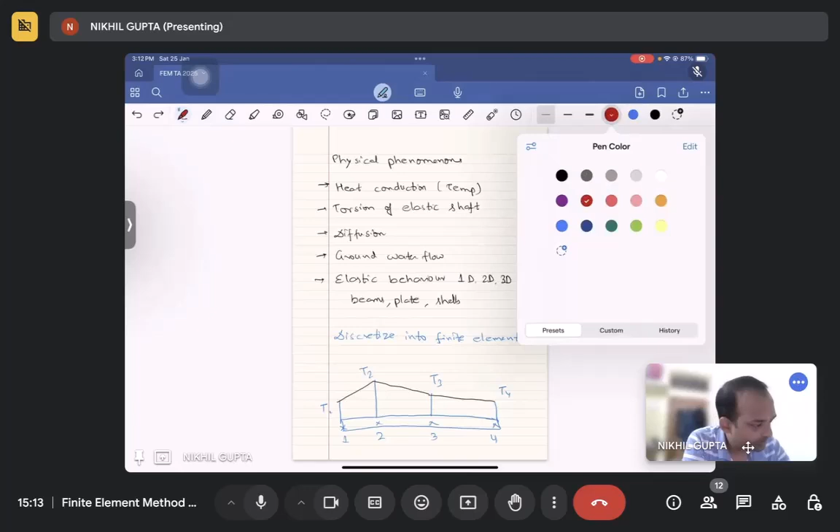So when we solve with the finite element method, maybe assuming a linear interpolation, we'll get a curve like this. But we don't know whether originally this is forming a linear interpolation or not. So when we solve it, we can get a curve like this. Oh, sorry. So it can follow any curve. So this is your exact solution, and the black one is your FEM solution.

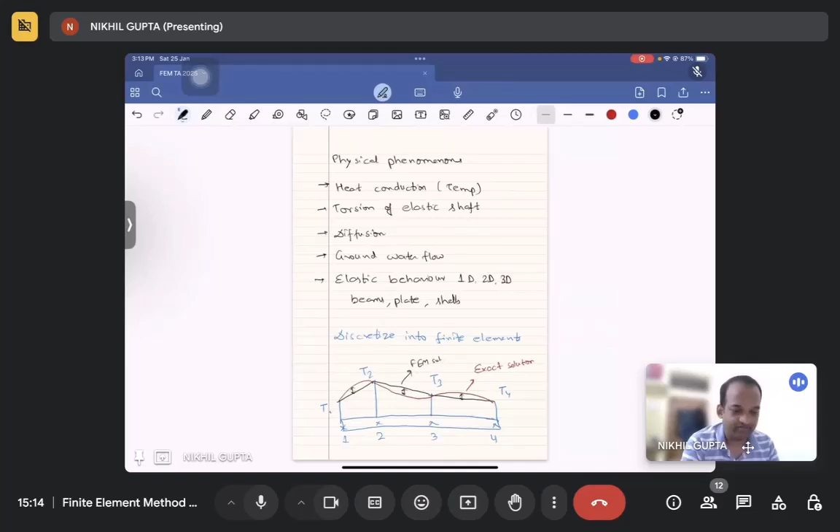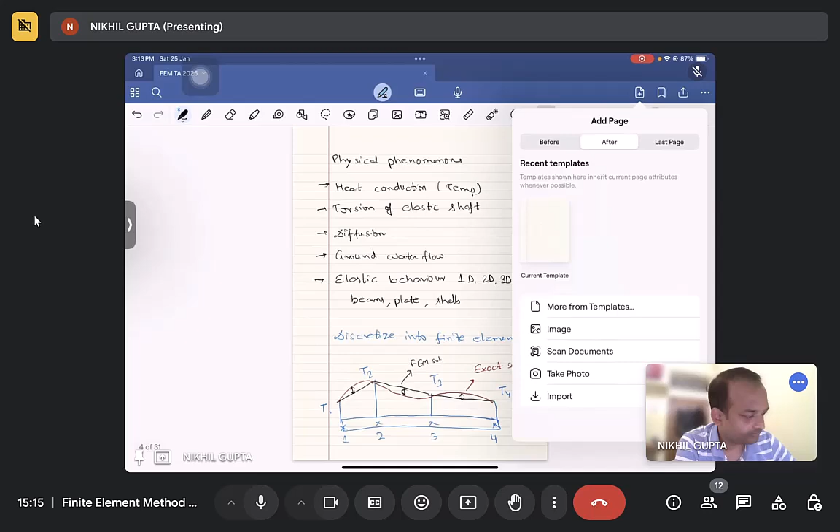So what we notice in this, we see there is a gap between the exact solution and the FEM solution. Since they are crossing at the same points at the nodes, FEM provides us the exact value there, but there is a gap in between, which shows that the FEM solution is not exact at that point.

So how to get to the exact solution from FEM? There are two methods to get to the exact solution in FEM. One is known as P refinement and the other is H refinement. So this is your bar. Let's say we have taken three elements and four nodes. One, two, three, four. These are four nodes and these are one, two, three elements.

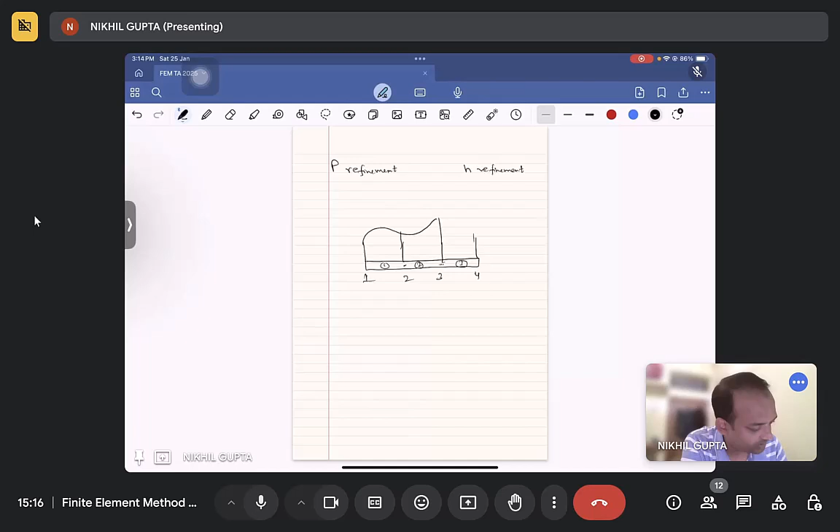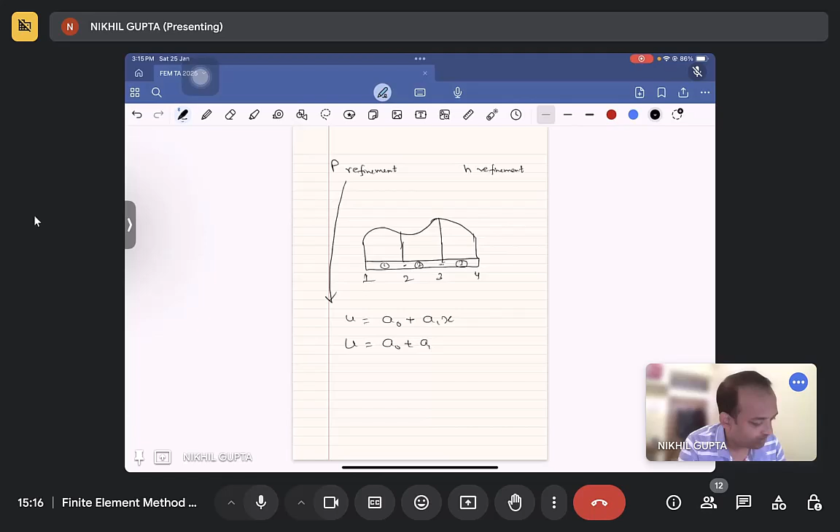Now, we can say that these temperatures are varying as a cubic or square parabola. In that case, we are refining it into a higher order solution, and this is known as P refinement. Initially we were assuming the variable as u = a0 + a1x. Now we will take it as a0 + a1x + a2x². So this suggests that we have assumed a higher order field variable to get to the exact solution.

The other is H refinement. In that, we can use a higher number of nodes. We can increase the number of nodes like this. See, 1, 2, 3. Now you'll get the exact solution at this point. And even if we assume it as linear, it may behave in a similar way. So if, let's say, the exact solution is like this, since the interval is so small, the error is also reduced.

Now I'll tell you how this thing happens. If you see the graph of number of elements and displacement, let's assume this is the exact curve. As we do mesh refinement in this direction, the FEM solution will increase, and at some point it will reach the exact solution. How is it reaching the exact solution?

Let's say our exact solution follows a0 + a1x + a2x² + a3x³. Let's assume our solution is cubic, and initially in FEM we assumed it as a0 + a1x. So it won't give an exact result, it will show a higher error. Similarly, at the point at which you assume it as cubic, or you increase the number of elements through mesh refinement, you will reach the exact solution. And for this we know that FEM solutions are a lower bound, not an upper bound.

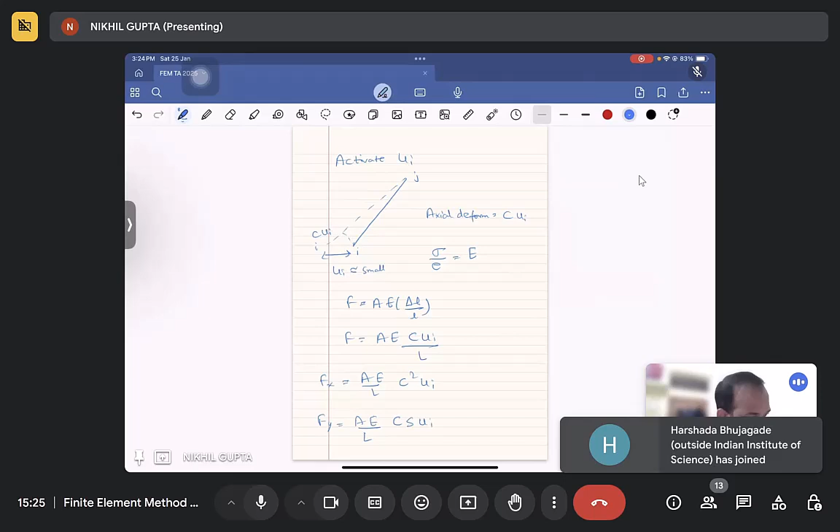So in the x direction it is AE by L C square ui, because for the x coordinate we'll multiply with cos theta. For the y component, we will multiply by sin theta, so it will become CS ui. To remind you, C and S are the cos and sin of theta, which we mentioned initially.

Similarly, when these forces are applied at these nodes, a similar reaction force will be acting at this point, because we are not allowing it to move. So this node will also have a reaction. At node J you will get fx as minus AE by L C square ui, and fy is equal to minus AE by L CS ui. How I got this? It will be the same in the x direction and y direction, just the opposite sign. This is because you have to maintain the equilibrium of this bar, and the x and y direction forces will be balanced.

So after getting this, the first column of K can be written as AE by L times C square, CS, minus C square, minus CS. If we write it in the full Kd equals F form, AE by L times C square, CS, minus C square, minus CS, multiplied by ui, will be equal to fix, fiy, fjx and fjy. The right hand side is the force vector which is acting externally on the structure.

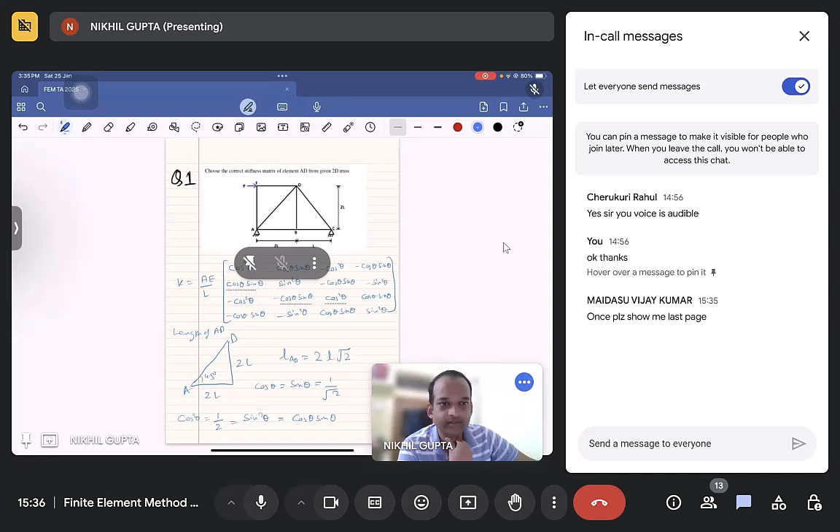I got it. Only please show me last page once, please. Okay, see this. I'll wait for 2 minutes to have a look. Let me know if I am too fast, and anytime you can ask me the doubts if you have any problem in this.

Okay, now we'll continue. This is minus 1 by 2, 1 by 2 and 1 by 2. So when we simplify it, the K matrix we'll get is AE divided by 4 root 2 L times 1, 1, minus 1, minus 1; 1, 1, minus 1, minus 1; minus 1, minus 1, 1, 1; minus 1, minus 1, 1, 1. So can anyone tell me, is this elemental stiffness matrix or global stiffness matrix?

If you don't want to speak, you can write also. Is it elemental or global stiffness matrix? Sure. Aryan, you are right. So why is this elemental? Because you are finding it for one of the elements. So if we have to find the global stiffness matrix, what we have to do? We have to find it for all the elements, and then make a summation on each of the different degrees of freedom and get to the global stiffness matrix.

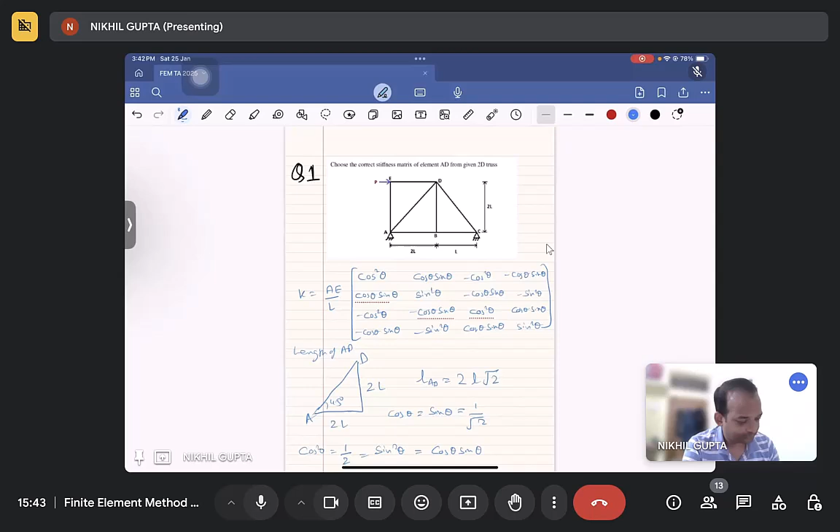What u1 in the column and u1 in the row signifies is that the column is where you are giving the unit displacement in that direction, and the row is the coordinate at which you are calculating the force due to the displacement at u1. So when you use the same formula we used here, you see that it is horizontal, so some part will be 0. One part will be 0, one part will be 1. So what you will get is like this.

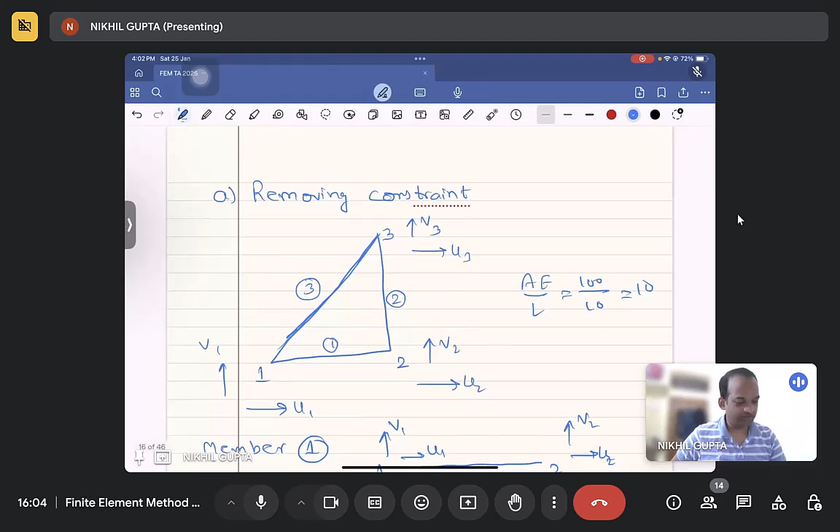Okay, so this is the final Ku equals F matrix, which can be solved using a method. One of the methods is the Gauss elimination method, which is asked in the question. See, it is written, solve it by Gauss elimination. So before solving by Gauss elimination, you have to make sure that the K matrix is non-singular. So here you have got a non-singular matrix K.

Now what you will do, you have to make it an upper triangular matrix. So you will transform R3 as R3 minus R2. So it will give you 10, 0, 0, 0, 10, 10, 0, 0, 5, then u2, u3, and v3. Wait, okay, correct, R3 minus R2. Okay, so we have done the matrix part.

Now if you solve it, you will get 5v3 equals minus 1, and v3 will be minus 1 by 5. Similarly, you will get u3 as 2 by 5 and u2 as 0. Okay, so these are the final solution, what you have computed. You have computed using FEM that if you apply this loading to a truss like this, what deflection will occur at each node. You have got that. So as we know, it is U2 or U3.

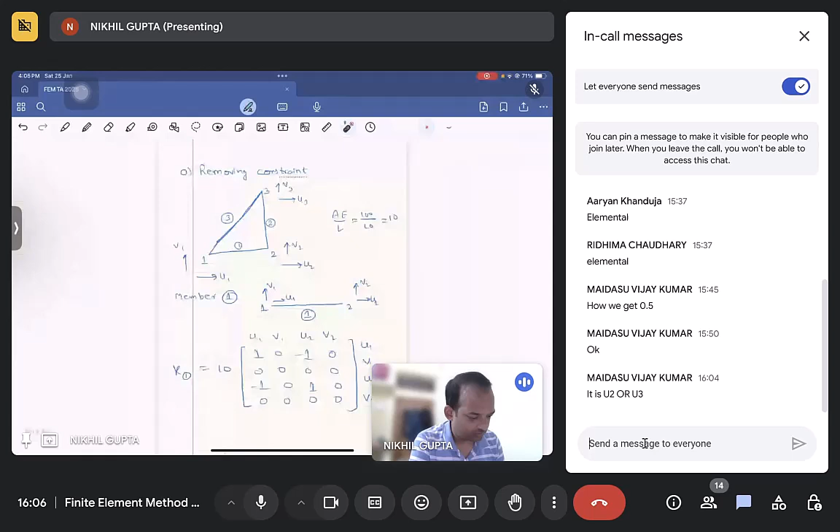U2, U3, and V3 are the unknowns. If you see, U2 is unknown, U3 is unknown, and V3 is unknown. The rest you have taken as 0. So U2 is also there and U3 is also there. So when you have computed this, we have got U2 as 0, U3 as 2 by 5, and V3 as minus 1 by 5.

Okay. Now the next part of the question says recover the nodal forces of all joints including reactions. Now we have to calculate the reaction forces. Okay, the next part of the question says to calculate the reaction forces.

Now let's take this K matrix. I have to make it again. This is 20, 10, minus 10, 0, minus 10, minus 10. Then this is 10,

10, 0, 0, minus 10, minus 10, minus 10, 0, 10, 0, 0, 0, then 0, 0, 0, 5, 0, minus 5. Okay, then minus 10, minus 10, 0, 0, 10, 10, minus 10, minus 10, 0, minus 5, 10, 15. This is the K matrix, the original K matrix which we have got.

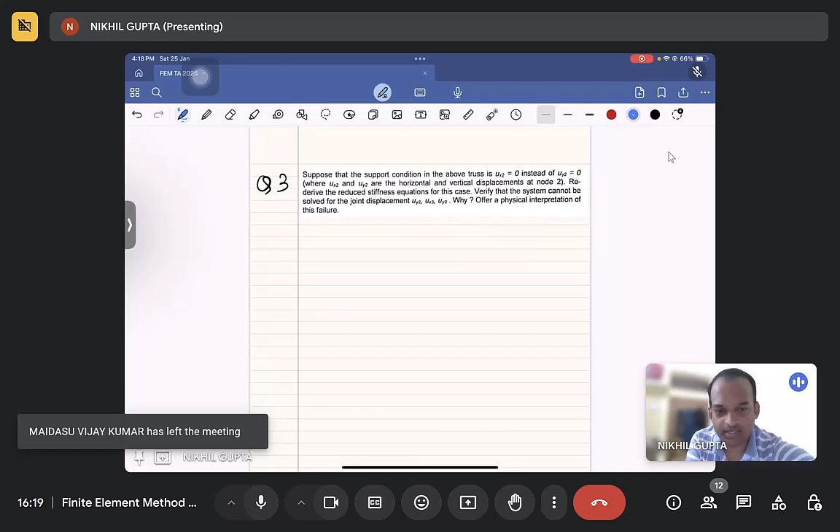Okay, so let's see the next problem, what it says. The next problem is a continuation of the previous question. I'll give you 2 minutes to have a look on it. I'll make the diagram if you have forgotten. Now what it is saying: in the previous question, it was like this. Now it is made vertical. Now it has made horizontal.

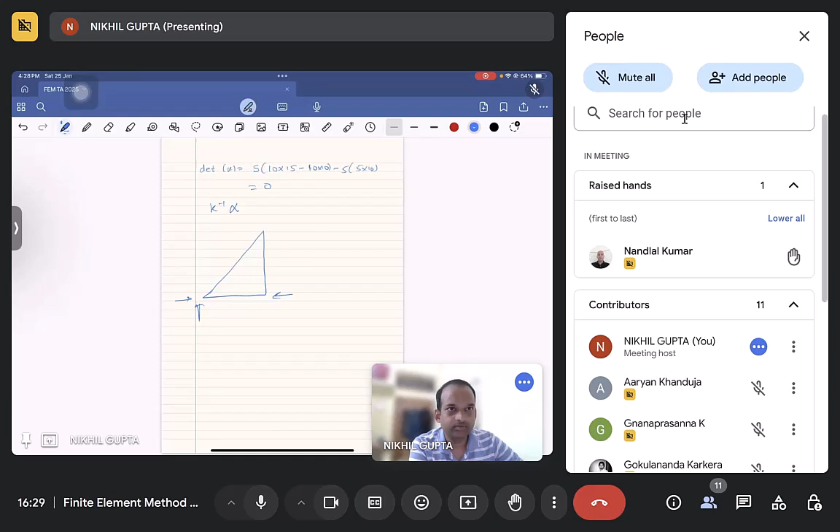Anyone who can write? Tell me. Okay, one thing you tell. Is it raised? Okay, tell me. You can write, or you can unmute yourself also. Someone is raising hand. Someone raised hand. Is it possible for you to write or something? You can unmute yourself also. Okay, no problem.

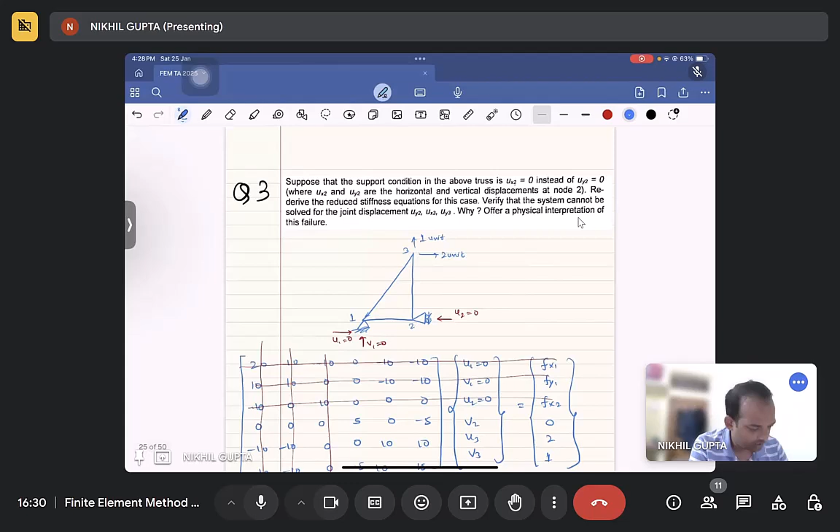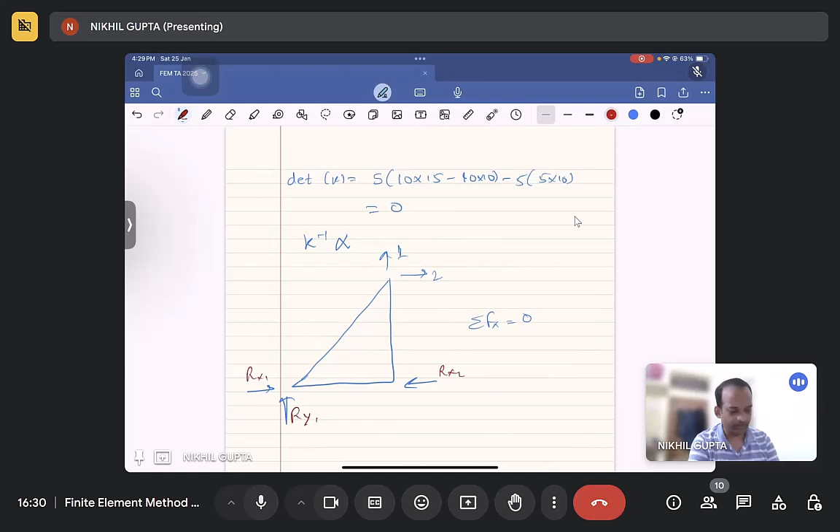Let me ask you one more thing. Is sigma Fx equal to 0 possible here? Here 2 is given, here 1 is given. Is it possible to have Fx equal to 0 here? This is Rx1, this is Rx2, this is Ry1. Tell me, is it possible? Yes, it is possible. Why not?

So see, Rx1 plus Rx2 is equal to 2. We can change the direction of each of it, and this can be done. If this is 2, this can be 1 and this can be 1 in this direction. Reactions are always opposite to the force applied. So yes, it is stable in x direction. So now let's see, is equilibrium maintained in y direction? Think about the same way I have solved the x direction and tell me, is this structure in equilibrium in y direction or not?

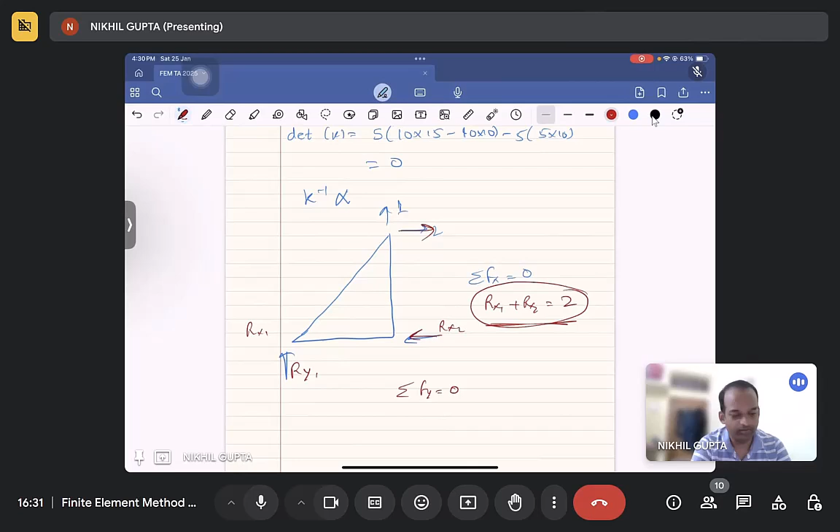No, sir. No. Why not? Tell me why not. I've got one answer, Gokul Nanda, but the answer is wrong. It is in equilibrium. How is it in equilibrium? You write sigma Fy equal to 0. You will write Ry1 equals 1. So whatever this 1 will be, it will be balanced by this.

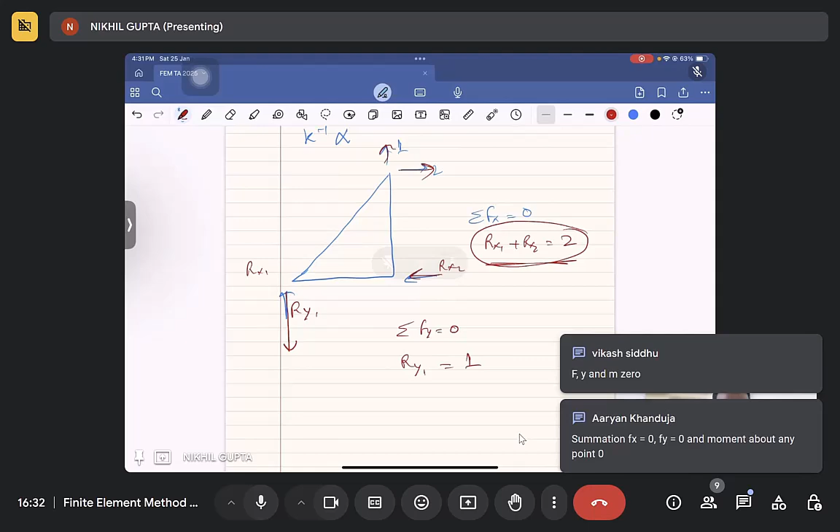But is the total structure in equilibrium? What are the three conditions we require for a structure to be in equilibrium? This is a simple strength of material concept you need to focus on. Two I have shown. I'll give you a hint that three are there. Tell me the third one. Yeah, correct. Two people have answered correctly, Vikash and Aaryan. So I'll continue.

So see, we have seen that sigma Fx equal to 0 is okay, sigma Fy equal to 0. Now let's take the third condition, which is moment at a point should be 0. So let's take this point, and this is your reaction going in this direction. This is your reaction going in this direction. Now the external force 2 is applying a moment in this direction, and there is no reaction for it to support.

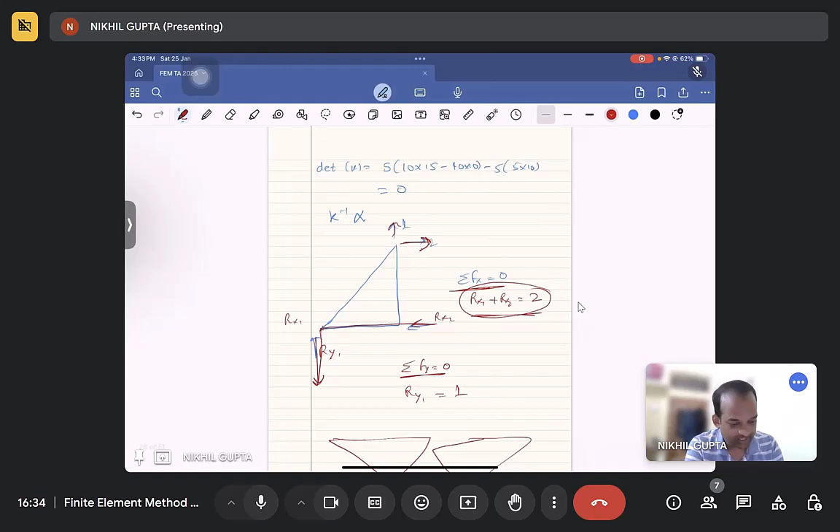You see this? So whenever these reactions are applied, the structure can rotate in any direction. If it is like this, it will move like this. Anyway, it can move. So in this question, the external forces are arranged in such a way that only two conditions of rigid body motion are countered. The rotation is not covered in this. So it is not possible for us to solve this structure because it is in rigid body motion.

So I'll write the reason so that you remember it. By changing the direction of the roller, all the reactions pass through a point.

Thus it will result into rigid body rotation. Hence, the structure is not in equilibrium, therefore it cannot be solved. So, what can we conclude with this?

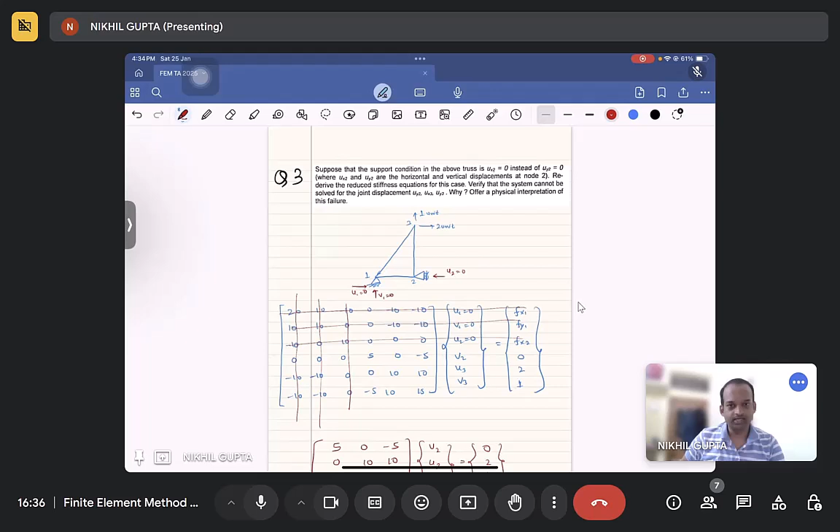That FEM not only helps us to solve a problem, but it can tell us whether the structure is stable, is in equilibrium or not, or is it solvable or not. So we have seen two problems with different support reactions, one without rigid body motion, one with rigid body motions. So, this signifies that the location of these external reactions is very important.

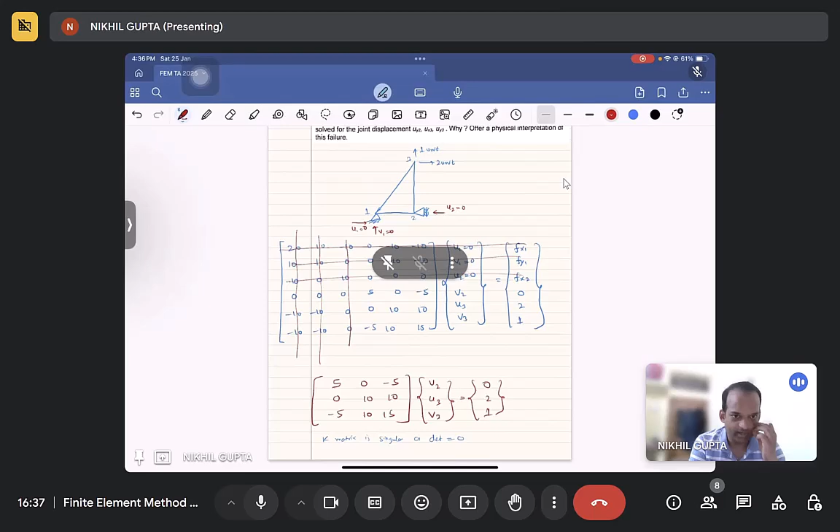Okay, so now, since I have done a lot of numerical things, let's solve some of the multiple choice questions now.

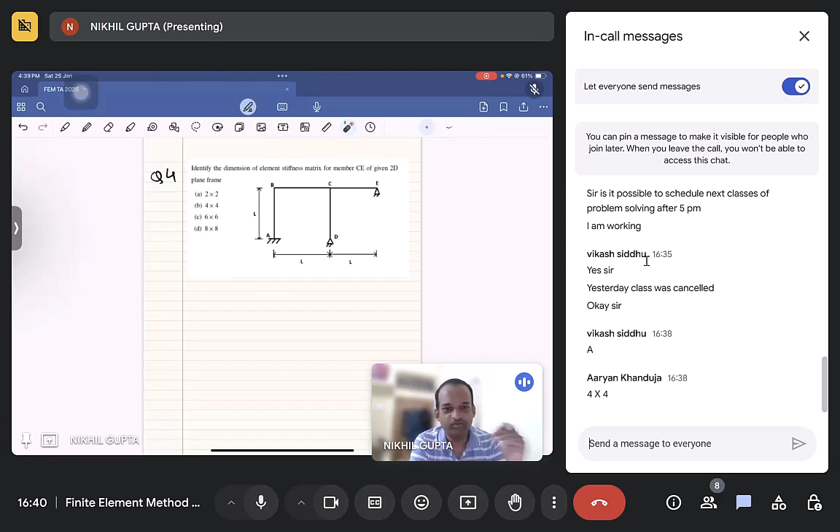Where is C? This is C. Anyone who wants to give a try? Just go for it. I'll give it 2 minutes. It's a simple problem. One has replied. Try more. One more answer I've got. I've got two answers, one from Vikash, one from Aaryan, but I'm sorry to say that both are wrong. I'll wait 2 more minutes for anyone else. Okay, I'll tell you.

One thing I told you while reading the problem, focus that this is a plane frame. What does this mean? This is not a truss, which would have 2 degrees of freedom. Truss cannot handle the moments. So if it had been a truss, then two here, but this is a plane frame, so one moment will also act here.

So it will be something like this, and one theta you will get here, one theta you will get here. So two moments. So now three here, three here. So total 3 plus 3 is 6. So what will you get? You will get a 6 cross 6 matrix of K. Okay. So this is the problem.

Now let's have one more thing to discuss in the theory part, the physical meaning of the K matrix. So you are forming a K matrix, you are solving a K matrix, but a simple question can be asked to you at any time, what does the K matrix signify? So you know the basic definition of it, that it is the force acting at each of the nodes when we apply a unit displacement at that node.

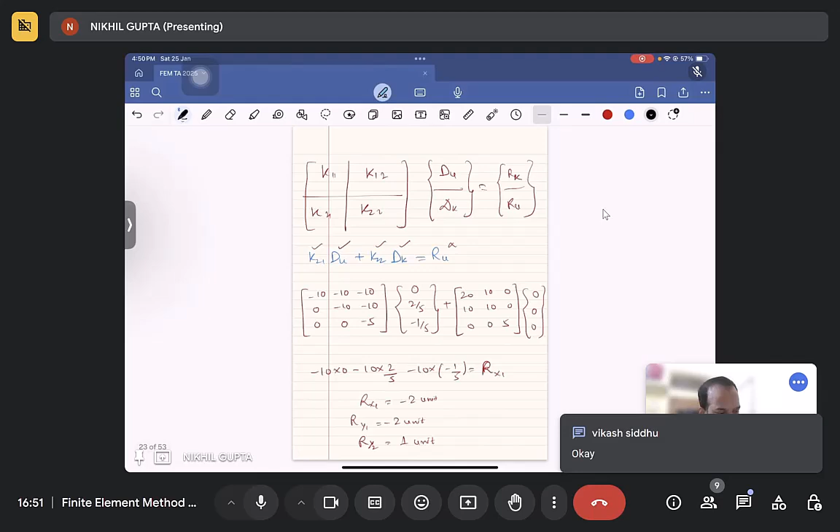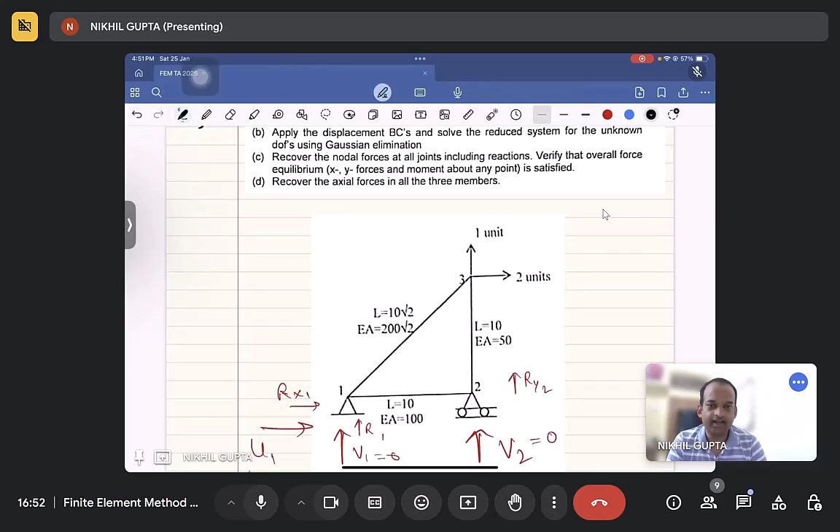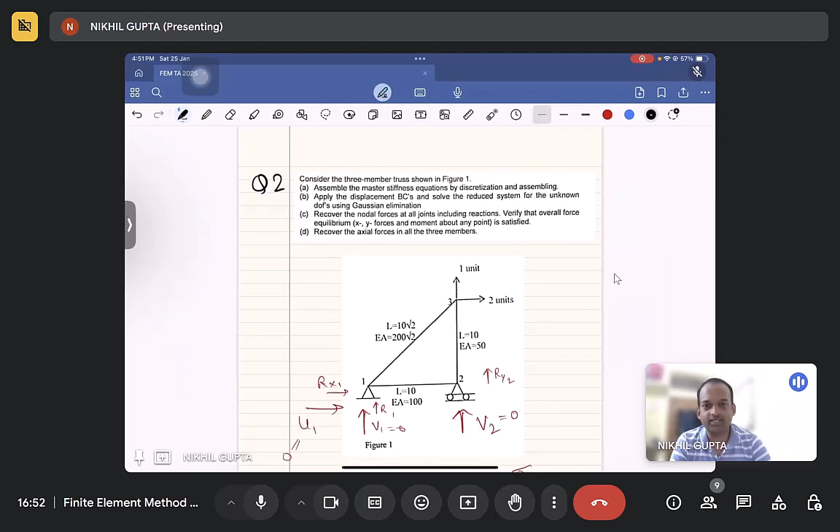So today we have discussed a problem which was very lengthy, and try to solve this problem on your own, because it's a big problem, and the whole of FEM is covered in it. This is the simplest problem we can solve here. That's why the simple problem can be solved by hand. For complex problems, we have FE solvers like Abaqus or ANSYS or different software packages. We just have to define the geometry of our structure, and the solver helps us to solve the problem.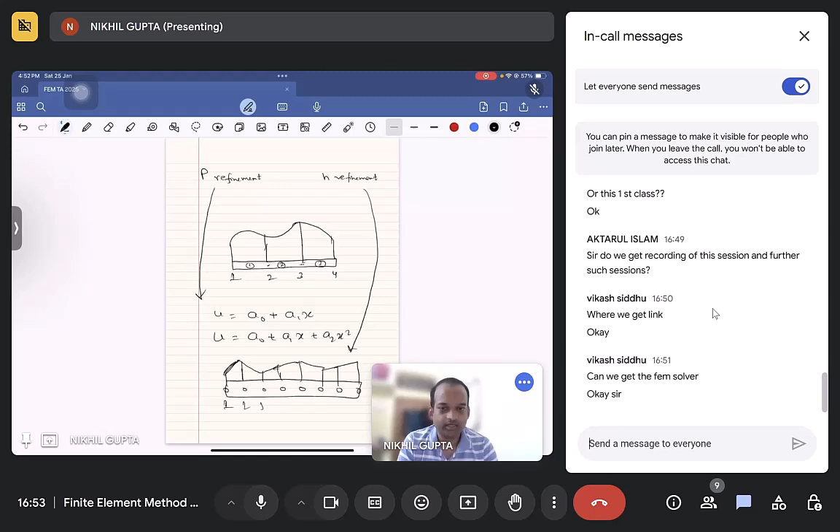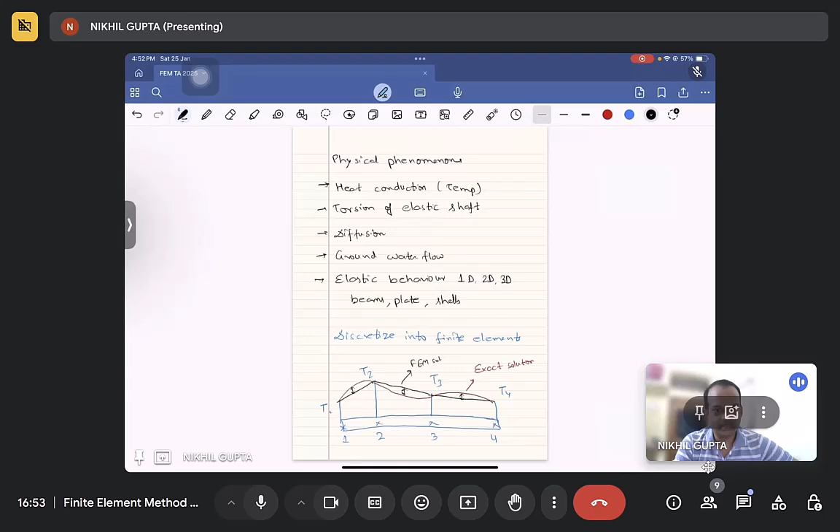Can we get an FEM solver? No, FEM solvers are paid software. Your college needs to purchase it, or the organization you are working in. Some FEM solvers can be free as well. You have to explore that if you want it. But these are commercially used FEM solvers. One of the names is Abaqus. You must have heard of it. There you can design a plate. You can change the mesh size and everything you can do with it.

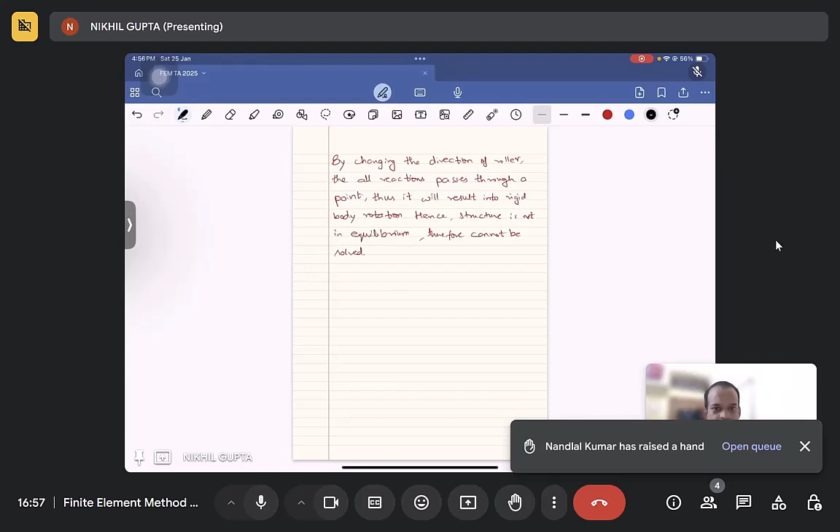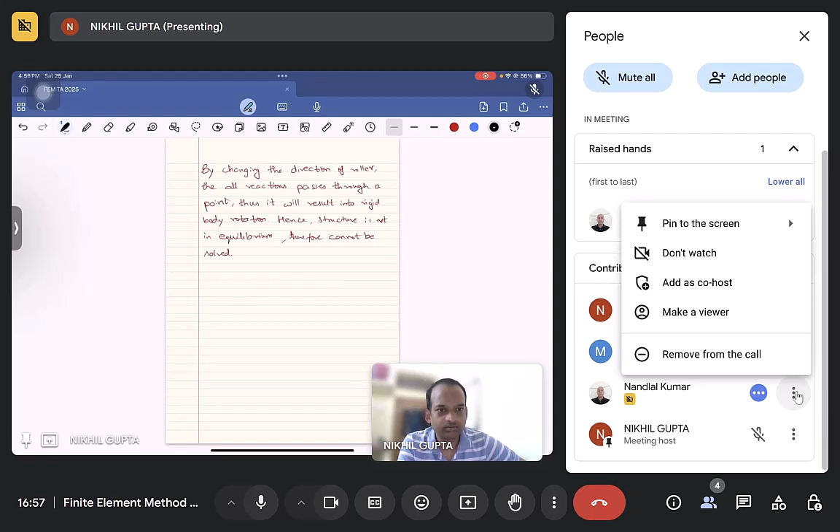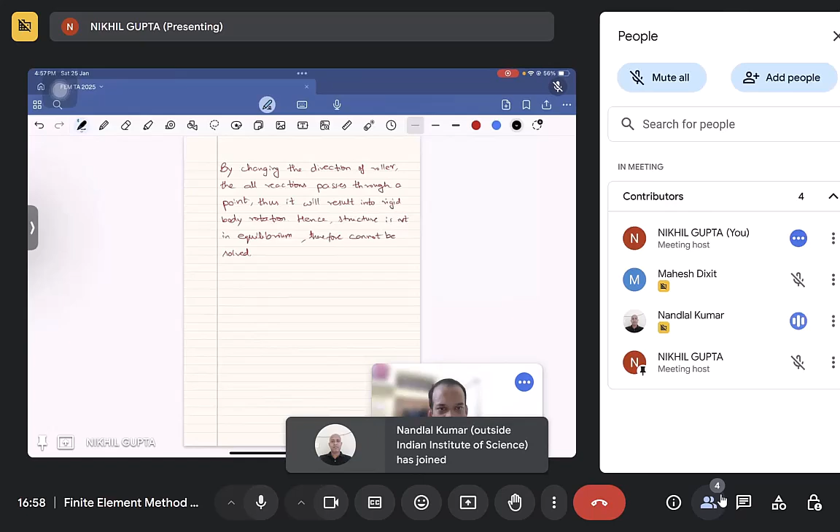Tell me, Nandlal, you are raising your hand, but your voice is not coming. No, I can't hear you. You have to write it. Please, if you can write in the chat box, I'll be happy to help. Yeah, I'm not able to understand fully. You have to ask a question regarding which part you are not understanding. Which question, which part? Basic means, is it related to this problem? What to read? Okay. So what to read? You are getting confused.

Basic books you have to see, I'll tell you the books related to it. There's a book, J.N. Reddy, An Introduction to the Finite Element Method. You can look into it. And if you want to go to a foreign author, there's Cook and Malkus. I'll write here if you want to refer to it. J.N. Reddy, An Introduction to FEM, finite element method. I think this will be enough for you to understand the basic part.

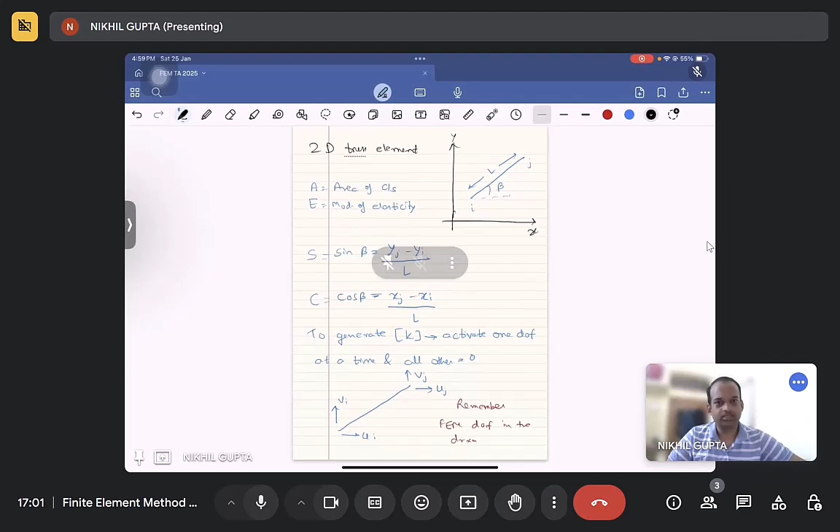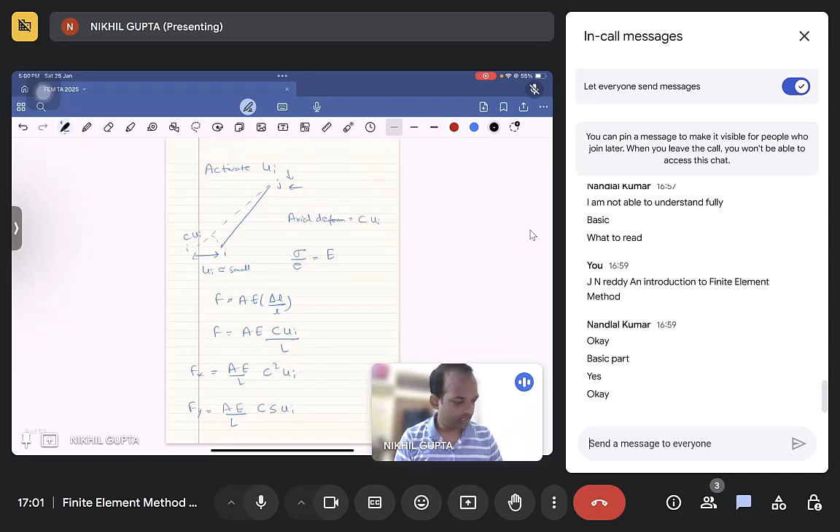Otherwise, you have to follow the lectures and solve the assignments, and you can ask me in the TA sessions. I'll clarify the doubts. I want to know if you are not able to understand today's lecture or the basic part of FEM. Try to read the books or the lectures which are given. Basic part means the FEM basics. It will be better if you understand the matrix methods covered in undergrad courses, but that part I have already mentioned in this TA session. So try solving all these questions which I have solved today. It will cover your basic part.

If you solve this problem on your own, the second problem, you will get to know a lot: how FEM works, how you are discretizing it, how you are making the assembly of all the elements and then making a global stiffness matrix, and how it is solved. So what the FEM solver does with a simple truss member is done here in this question. So try solving it. Otherwise, I'll be there in the next session. Do ask me. I'll be happy to help.